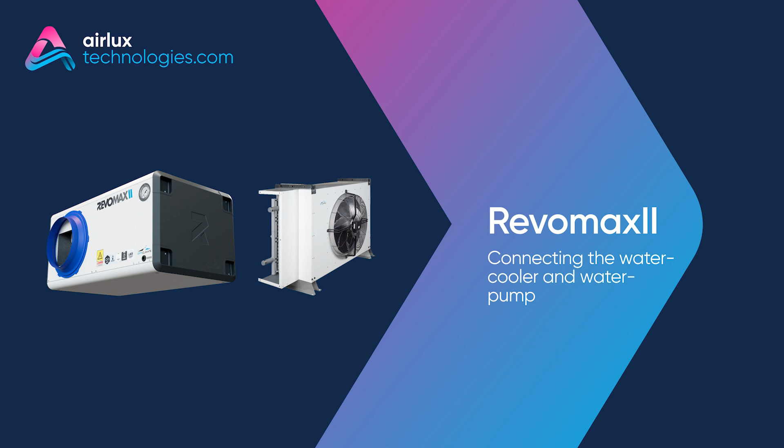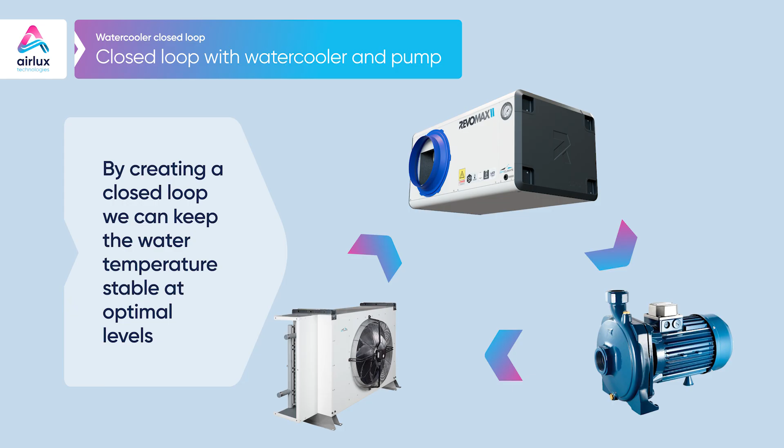The RevomaxII requires a continuous, clean and cool water supply to operate efficiently. This can be achieved by either connecting it to an open-tap water supply or by creating a closed-loop system with a water cooler. It's essential that the incoming water temperature always stays below 25 degrees Celsius. In this video, we'll explore the closed-loop setup using a water cooler.

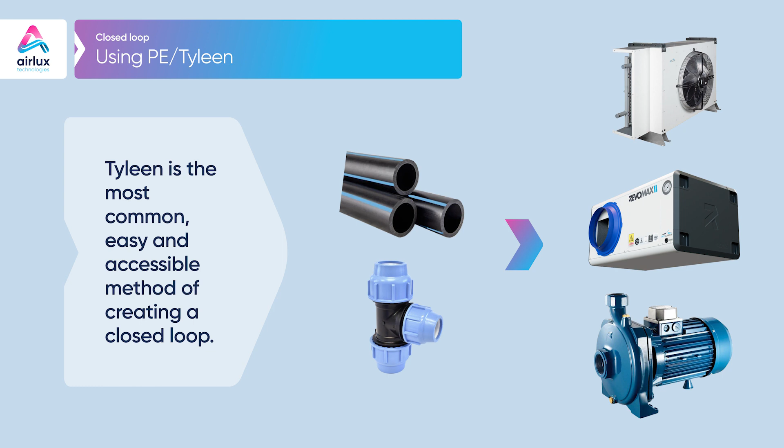The most common, easy and accessible option is to use polyethylene piping with quick connectors. In this video, we'll show you a great alternative using PVC. In a closed-loop system, a water pump circulates the water. Once filled, the system can run indefinitely. It's the most common and environmentally friendly option, no matter your climate.

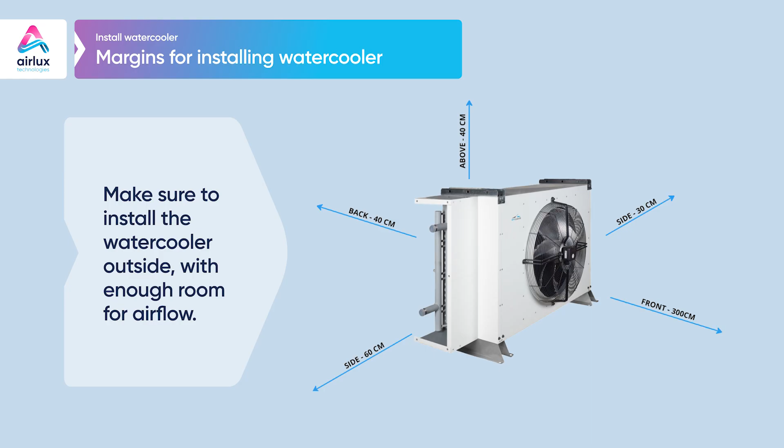Today we'll guide you through 7 easy steps to build your closed-loop setup. Before we begin, make sure to install the water cooler outside the building with enough room to ensure proper airflow for both intake and exhaust. Now let's begin to connect the RevomaxII to the water cooler and water pump.

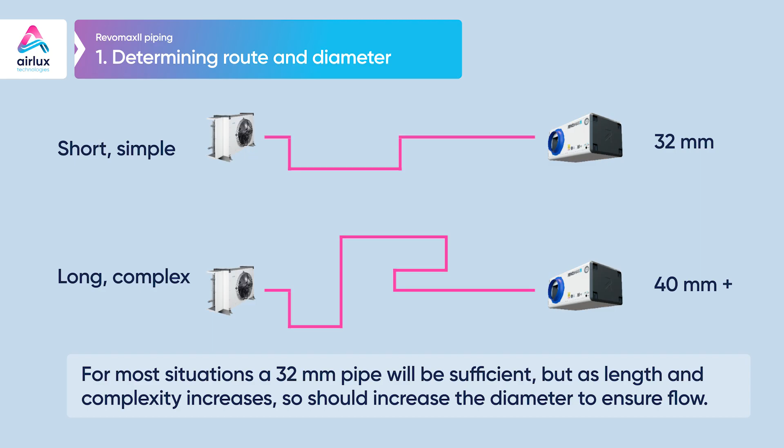Step 1. Start by determining the length and route of your piping to choose the right diameter. For shorter distances, standard 32mm PVC piping is usually fine. For longer distances or routes with many bends, larger pipes may be needed to maintain water flow. Every setup is unique. Consult a professional for help selecting the right diameter. Ensure that the RevomaxII, the water cooler and the pump are properly installed and easily accessible.

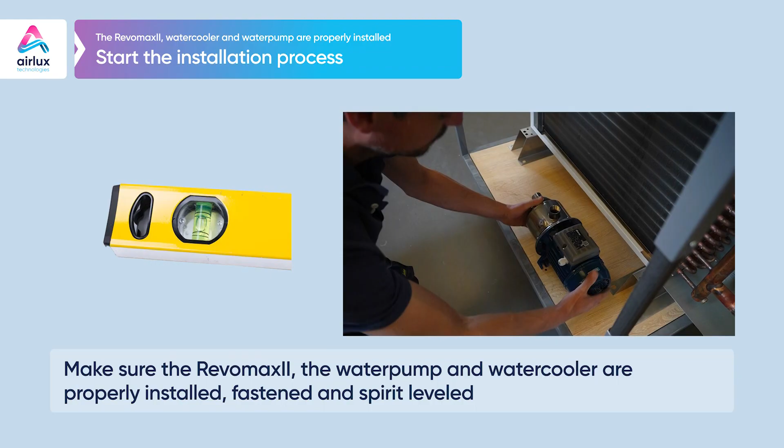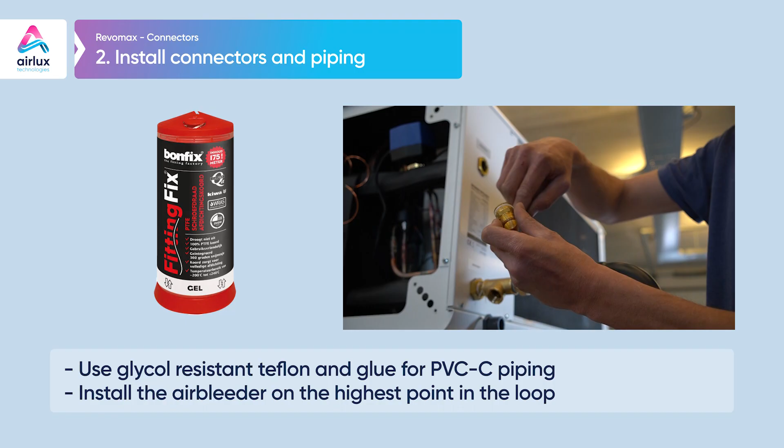Step 2. Attach the supplied connectors to the RevomaxII's inlet and outlet. Always use Teflon thread on threaded metal connections to ensure a watertight seal. We'll be using PVC piping, which needs to be glued. Determine the highest point in your installation and place the air bleeder there.

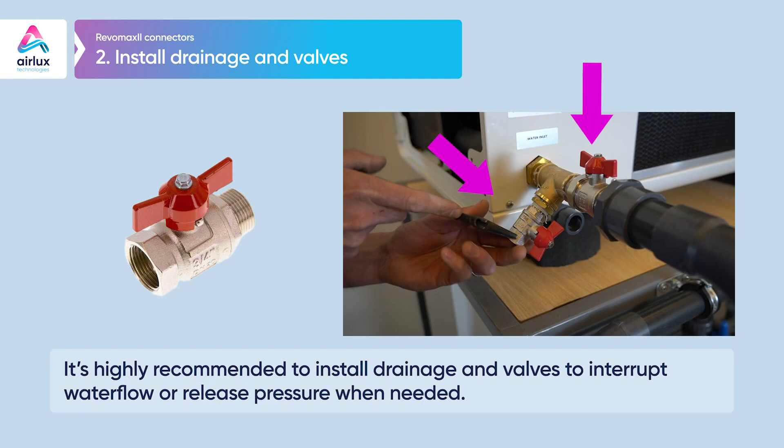Install drainage taps and valves on both the inlet and outlet lines. This allows you to shut off water or drain the system if needed. This step is optional but highly recommended. Step 3. Continue the piping from the RevomaxII inlet to the water cooler outlet. Add a T-connector and prepare it for a temperature sensor. Then install the sensor.

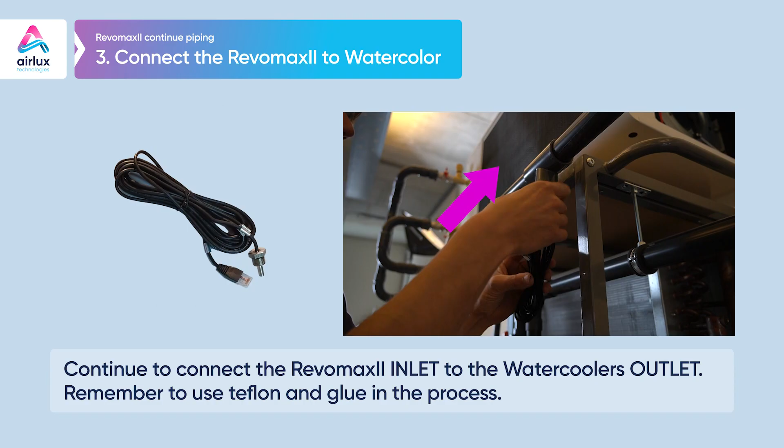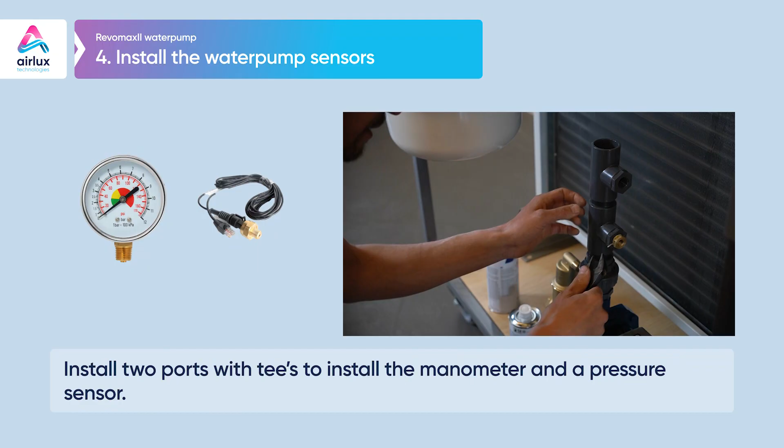Step 4. Now connect the water pump. Start by attaching an air separator to the pump's inlet. From the pump's outlet, prepare 2 ports, one for a manometer and one for a pressure sensor. Once the glue is dry, install the manometer and pressure sensor.

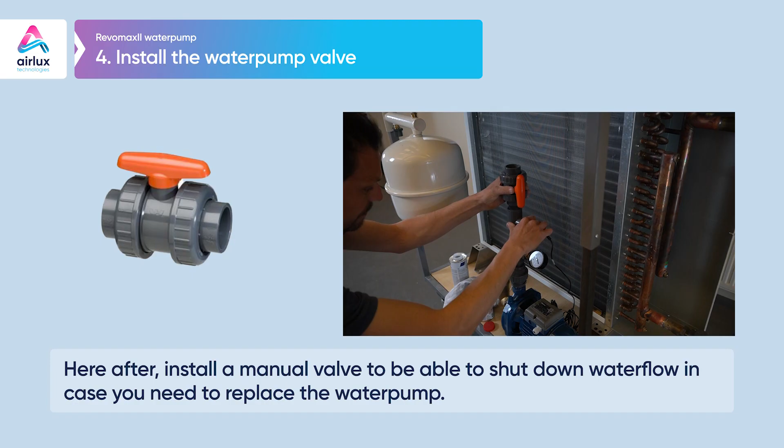Now install a water valve to shut down water flow in case of errors. Continue the piping to the cooler's inlet. Again, glue the PVC joints properly and use Teflon on all metal connections. At this point, the line from the pump outlet to the cooler inlet is complete.

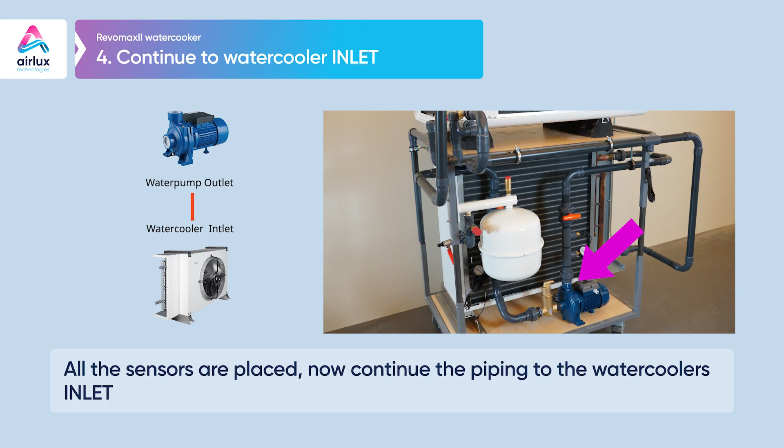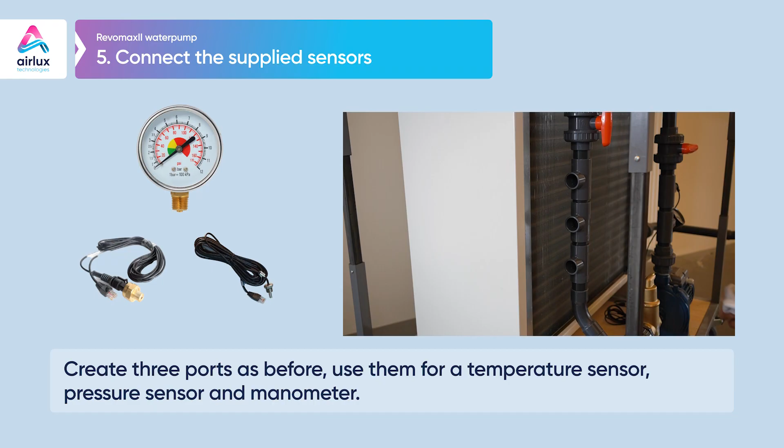Step 5. Next, connect the RevomaxII outlet to the pump's inlet. You've already installed the air separator. Continue piping in the direction of the RevomaxII and create 3 ports, one for a manometer, one for a pressure sensor, and one for a temperature sensor. Once the preparations are in place, install the sensors.

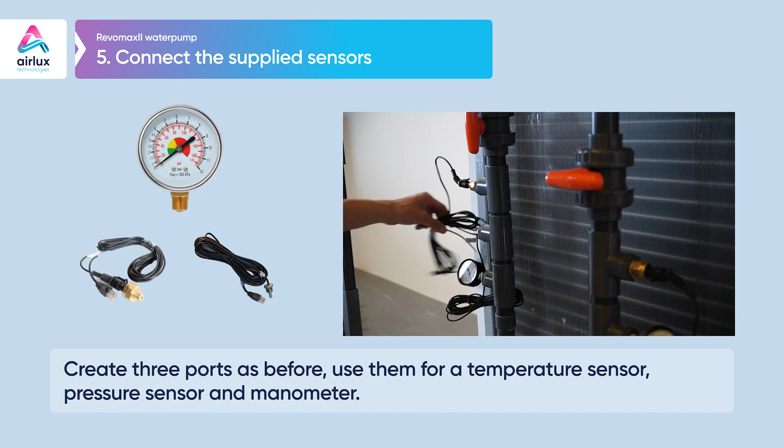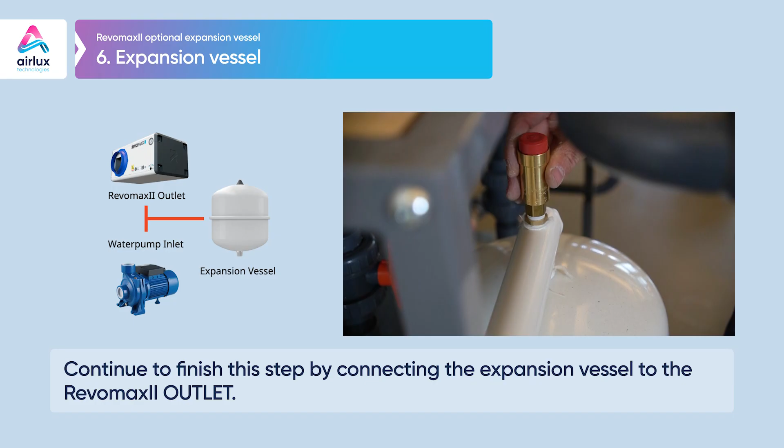Step 6. This step is optional, but highly recommended. To stabilize water pressure under all conditions, install an expansion vessel just outside the loop using a T-connector. On that same T, install a pressure relief valve and a filling tap. The relief valve protects the loop from overpressure. Then finish the piping to the RevomaxII outlet.

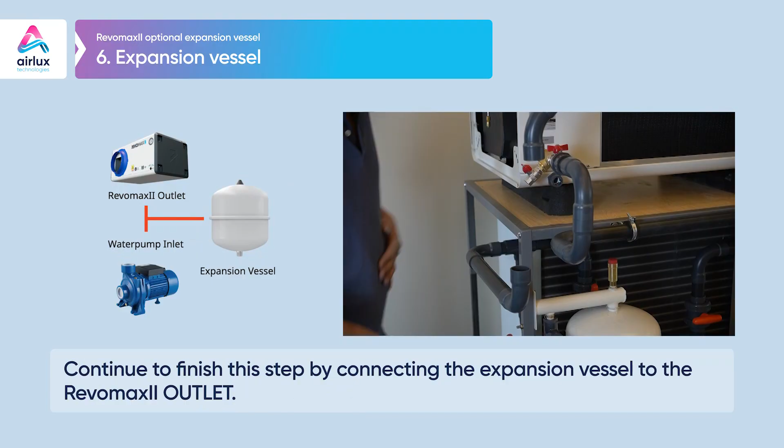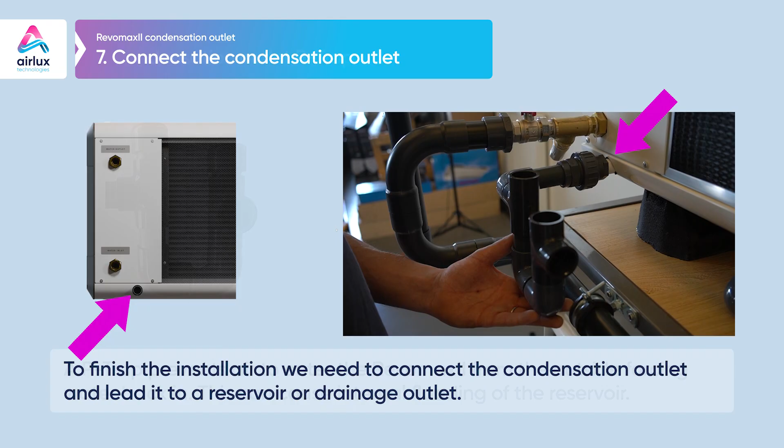Step 7. Let's take care of the condensation outlet. When dehumidifying, the RevomaxII produces condensation water that must be drained. Install or create a P-trap to prevent air from entering through the condensation outlet. Direct the pipe to a reservoir or a proper drainage system.

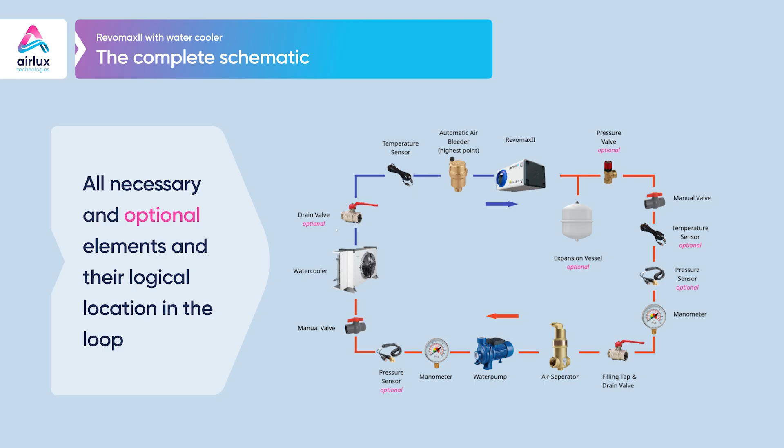The complete setup should look like this. Make sure all piping is glued and Teflon is used in the metal connections. Congratulations! Your RevomaxII closed-loop water piping system is now complete. To finish the setup, continue with the basic control setup video or check our installation manual for the advanced control setup.